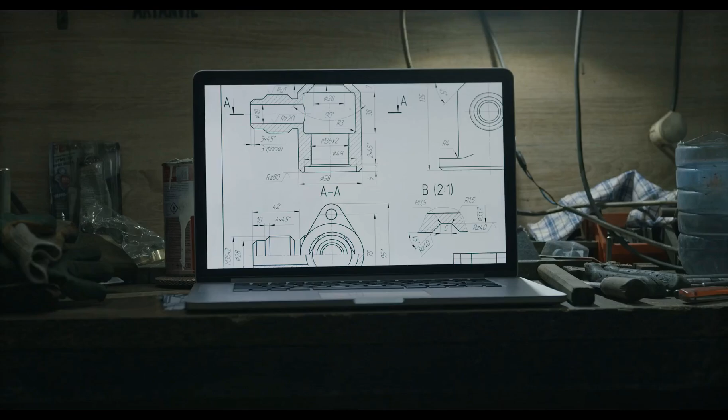If you're preparing for a technical drawing exam using AutoCAD, or maybe you just use AutoCAD for your job on a daily basis, in this video we'll be looking at 7 essential tips to help you master AutoCAD and save time. I don't want you to miss anything, so make sure you watch it till the end.

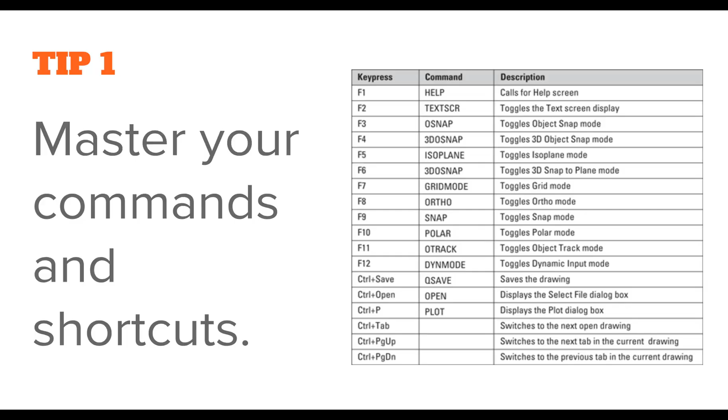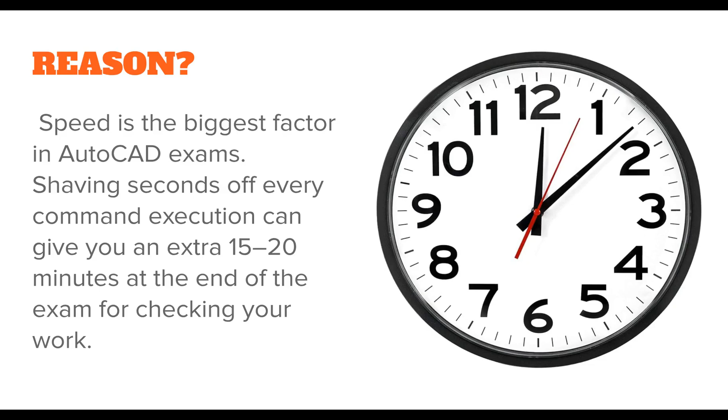Tip number 1: Master your commands and shortcuts. Speed is the biggest factor in AutoCAD exams, or technical drawing exams, or any exam. Shaving seconds off every command execution can give you an extra 15 to 20 minutes at the end of the exam for checking your work.

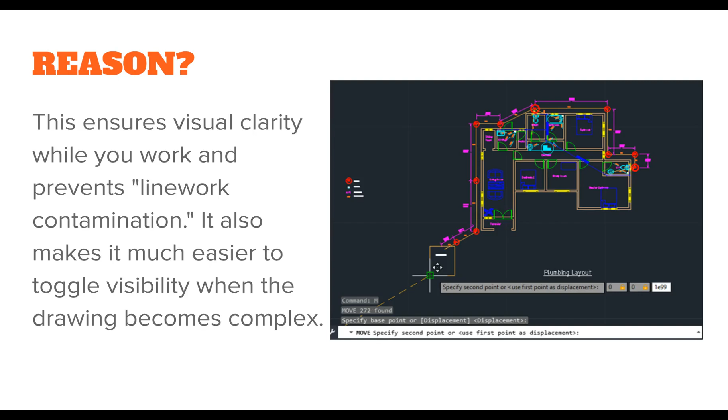So use your shortcuts. Number 2, use and manage your layers well. This ensures visual clarity while you work and prevents line work contamination. It also makes it much easier to toggle visibility when the drawing becomes complex, and it just gives you peace of mind. So use your layers.

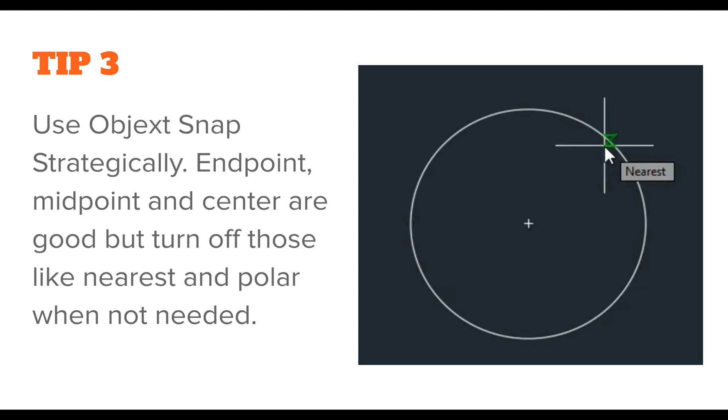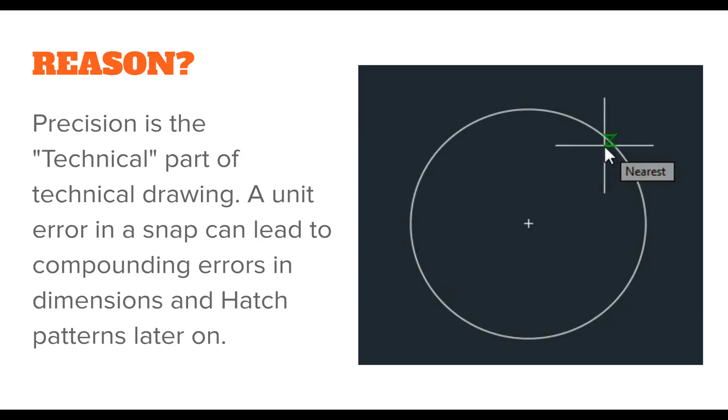Tip number 3: use object snap strategically. Endpoint, midpoint, and center are good, but turn off things like nearest and polar when not needed. Why? Precision is the technical part of technical drawing. A unit error in a snap can lead to compounding errors in dimensions and hatching later on, and we definitely don't want that.

So be wise and choose your object snaps strategically. Tip number 4: Draw at scale 1:1 in model space and do the scaling in the layout, paper space, or viewports. AutoCAD is designed to calculate dimensions automatically based on geometry. Drawing to scale in model space ensures that your measurement tools and annotations remain accurate with no calculations necessary.

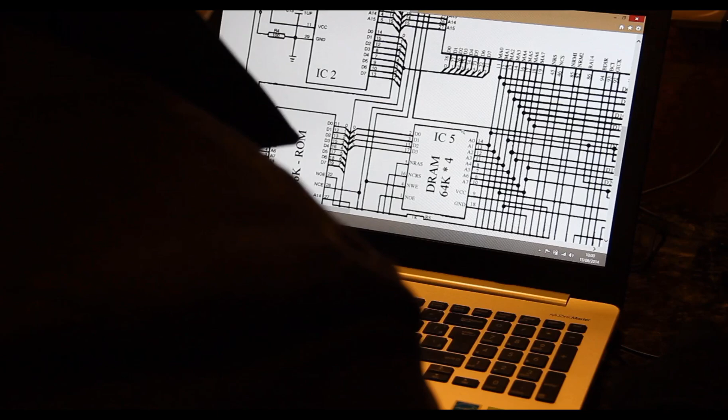Tip 5: Use blocks if the exam requires multiple instances of a specific component, like a bolt or a chair. Why? Because it saves a ton of time, and if you realize that you made a mistake in whatever drawing or component, you only have to edit the block definition once to update every instance in the drawing. So save time, be wise, and use the block.

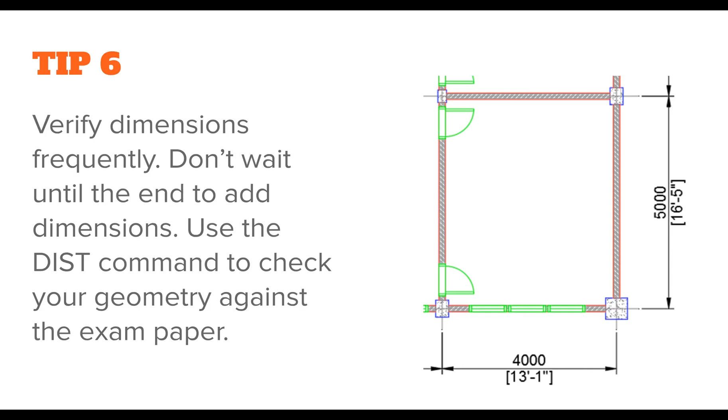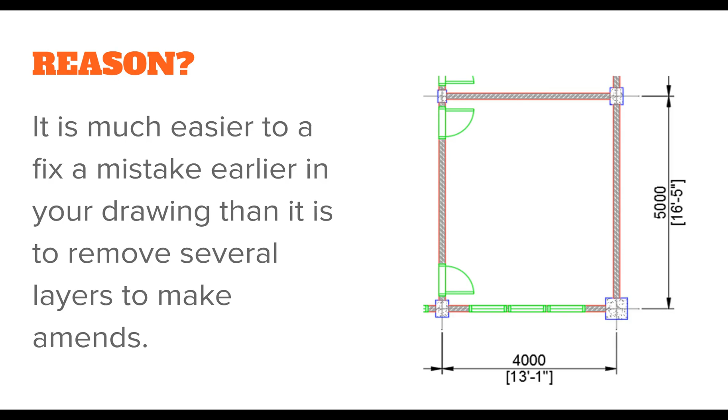Tip 6: Verify dimensions frequently. Don't wait until the end to add dimensions. Use the DIST command to check your geometry against the exam paper, because it is much easier and better to fix a mistake earlier in your drawing than it is to remove several layers or lines to make amends and fix it.

Tip 7: Save your progress. AutoCAD has an autosave feature that periodically saves work, but you should do it as well. Software crashes or hardware freezes are rare but catastrophic during exams. Manual saving ensures you never lose more than a few minutes of work, and it gives you that peace of mind.

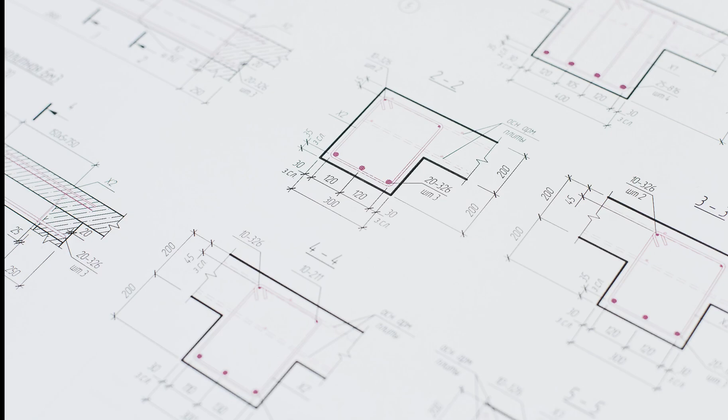And that's it. This brings us to the end of our video. I trust that you would have learned from the 7 tips, and not only that, but I trust that you will implement them in your drawings or your workflow.